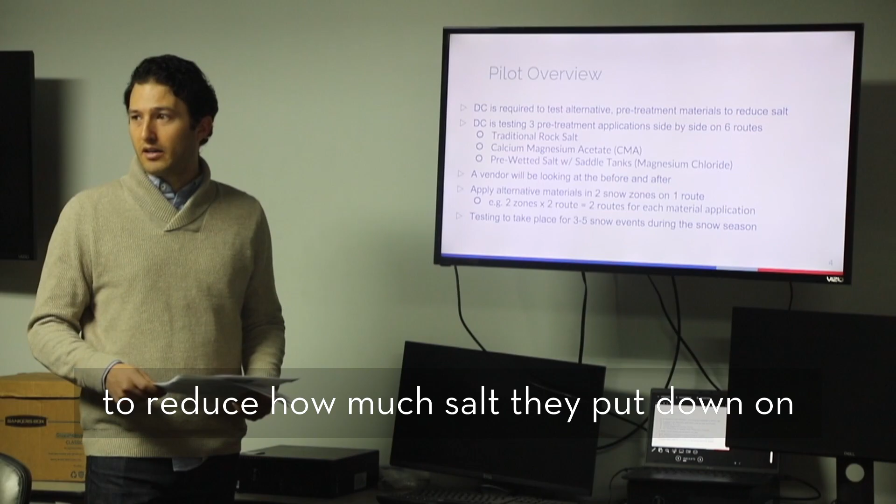So what is the salt reduction pilot? Well, DC is required by the US EPA to try to reduce as much salt that we're putting out on the streets, which eventually gets washed downstream and gets into the local environment. It gets in our rivers, it corrodes vehicles and equipment and roadways. It's essentially quite harmful to the environment. And so the whole region in DC, Maryland, Virginia is actively trying to reduce how much salt they put down on the road during the winter, during snow and ice events.

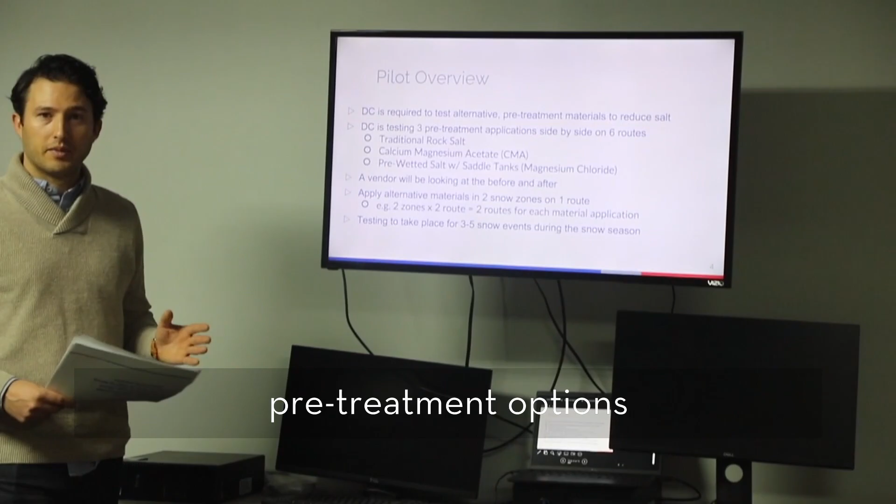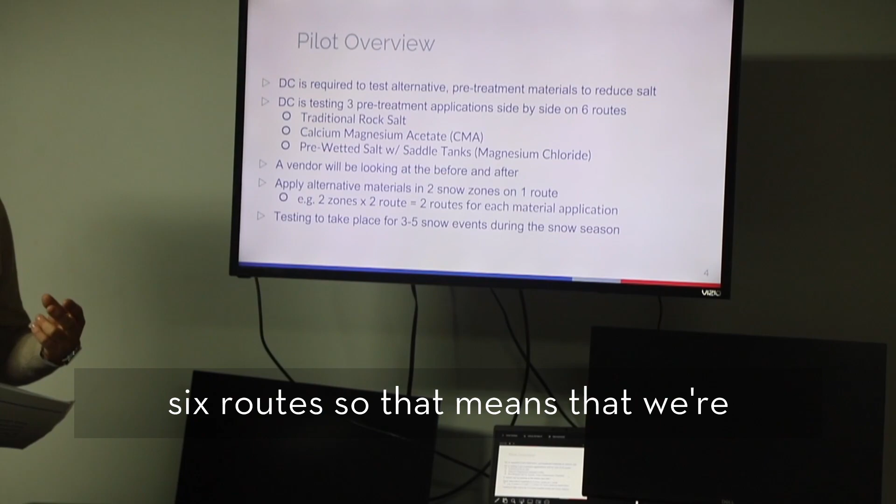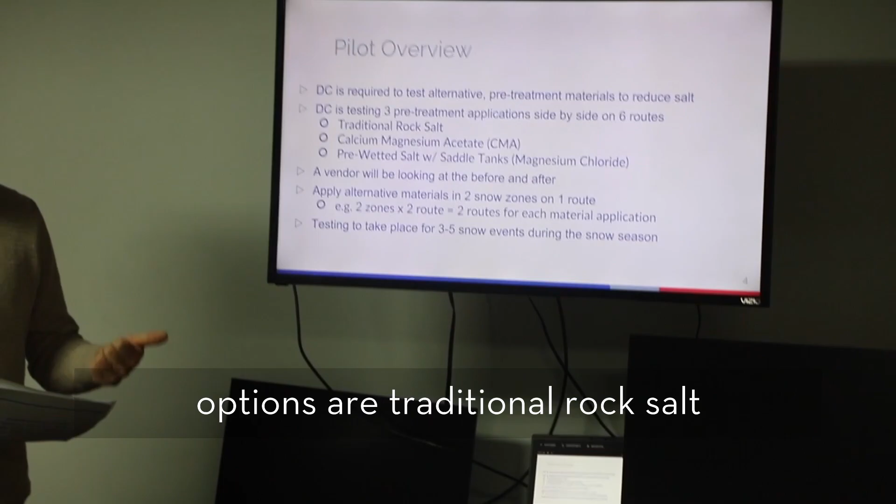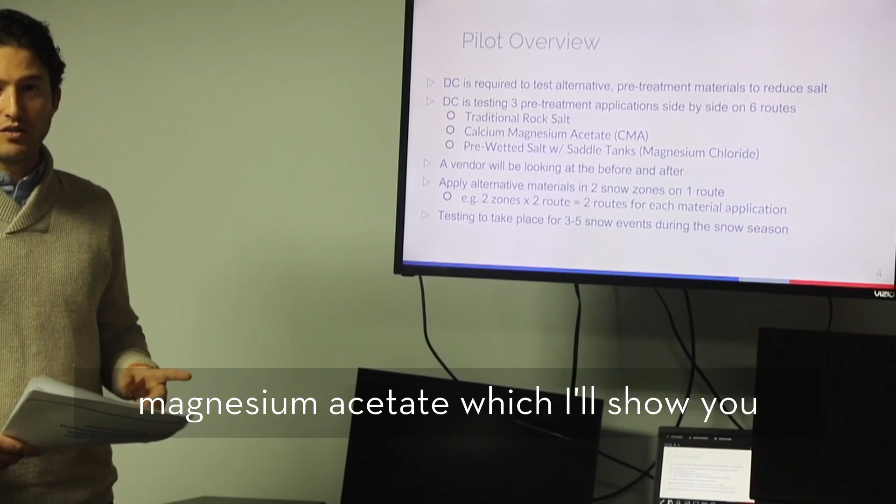So in order to do this, what we decided to do as a city is test 3 different pre-treatment options, side by side on 6 routes. So we have 3 treatment options, 6 routes, so that means that we're going to be testing each material on 2 routes. And we'll go through exactly which routes those are in a second. But again, the 3 pre-treatment options are traditional rock salt. We typically would put down basically the normal material. Calcium magnesium acetate, which I'll show you what that looks like in a second. It's has the same sort of performance qualities of rock salt.

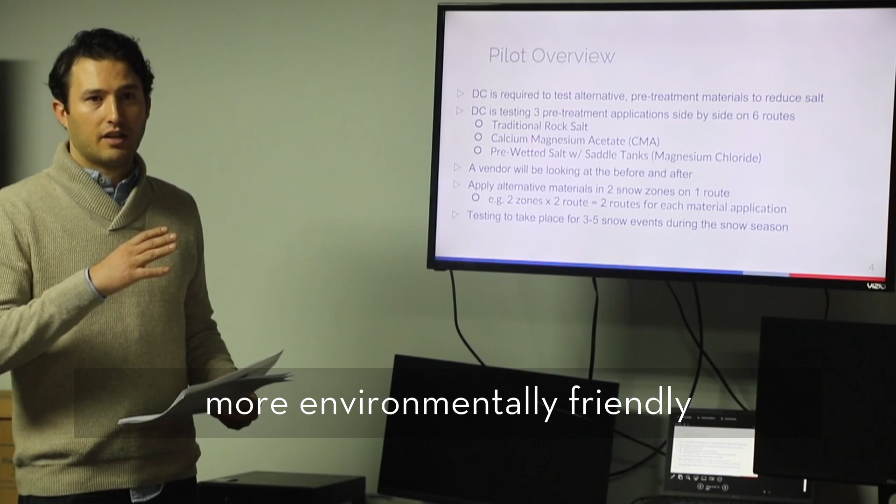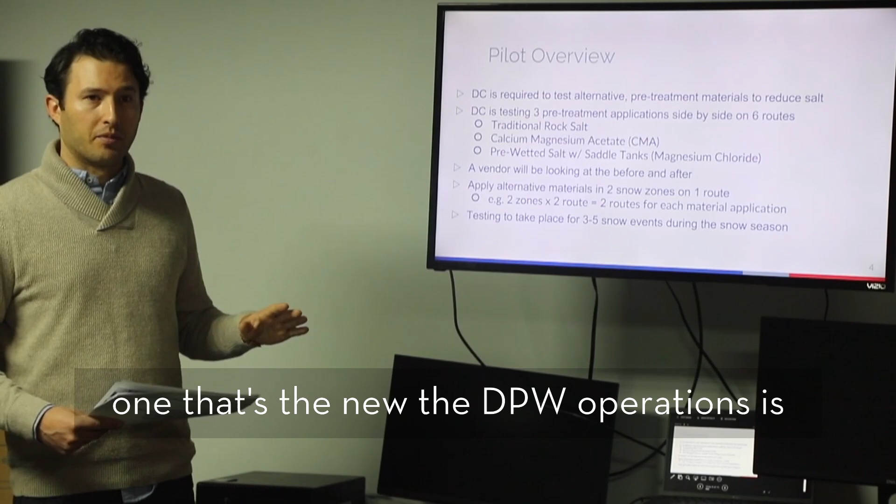It looks a little bit different, performs a little bit differently. We'll get into that, but it's more environmentally friendly. It's traditionally a more expensive material, but they use it on airports because it has a high performance value in low temperatures, and it's more environmentally friendly. So we'll talk about that. And then the last is pre-wetted salt with saddle tanks. So those are the three treatment options that we're going to be testing on 6 routes. The only one that's new to DPW operations is the calcium magnesium acetate.

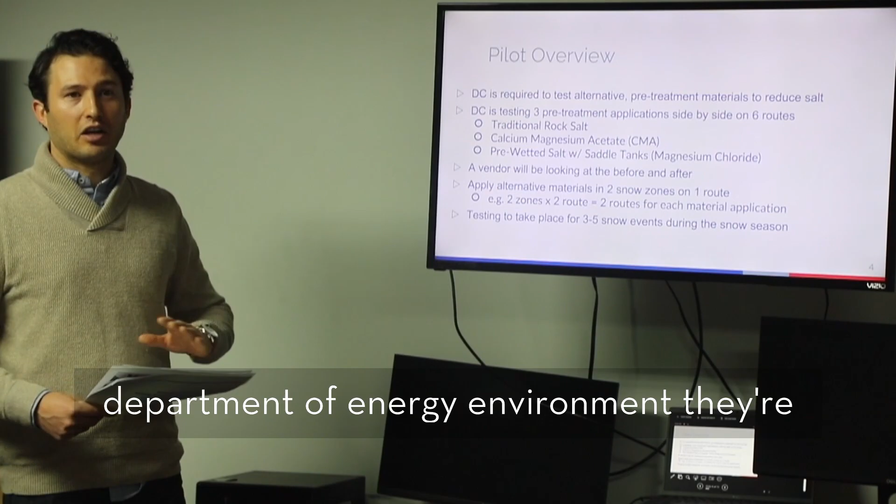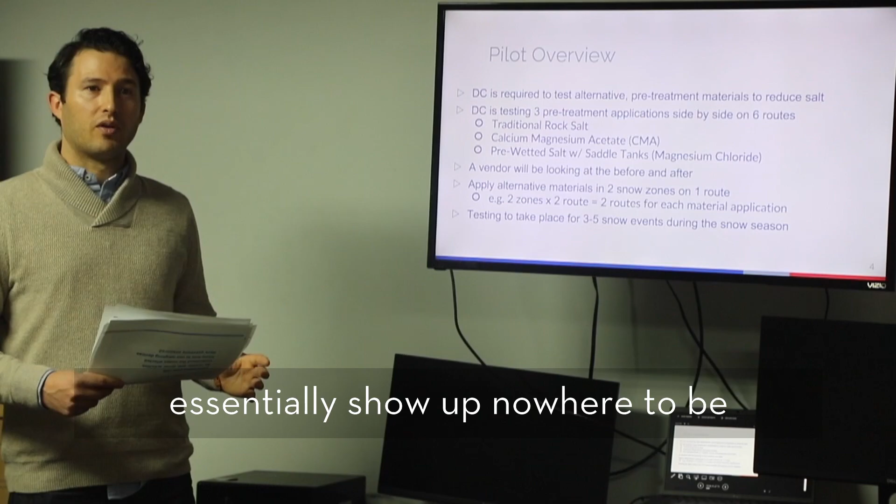A vendor has been hired, Tetra Tech, through the Department of Energy and Environment. They're going to go out and take a look at before and after to assess how well these materials are performing. So all we're asking you all to do is essentially show up, know where to be, understand the material that you're loading in your vehicle, how to check in, check out, apply the material, and that's it.

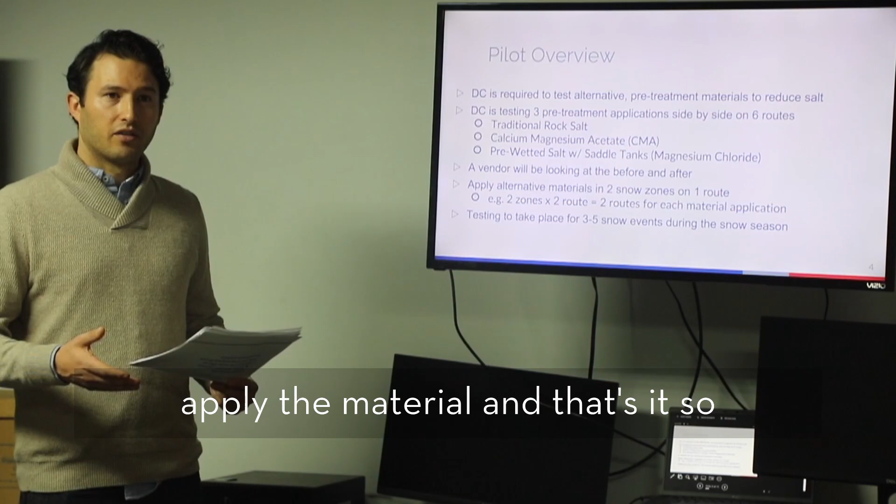So hopefully we're not asking too much different. Again, the only real difference is this new material that we're going to be talking about in a second.

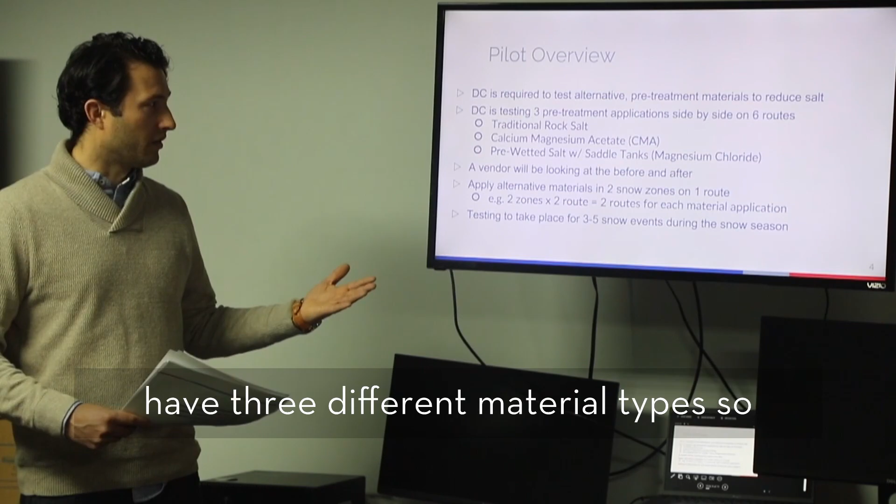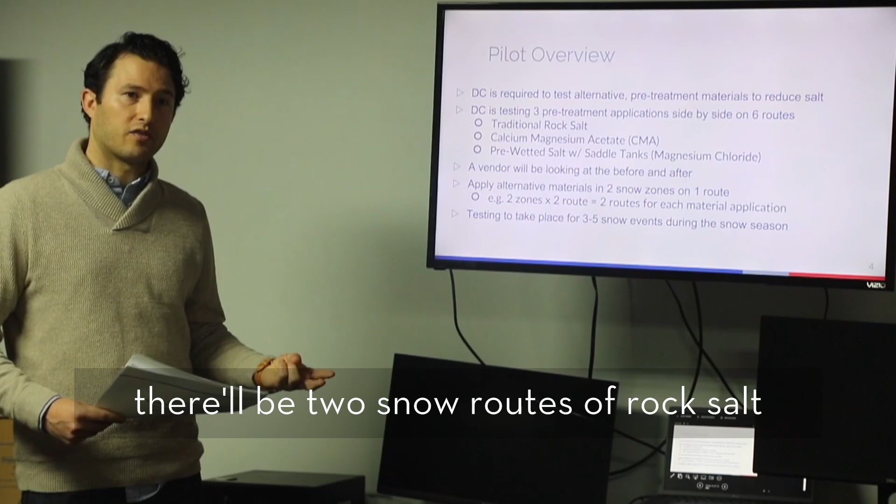As I mentioned, we have 6 routes. We have 3 different material types, so that means there are 2 zones and 2 routes where we're going to be putting down each material. There'll be 2 snow routes with rock salt, 2 for CMA, and 2 for the pre-wetted salt with the saddle tanks. The goal here is to test these materials for 3 to 5 snow events this snow season.

Now, the weather's not been all that conducive over the last couple of years. If we run this pilot twice this year, that would be a huge success. And we'll talk a little bit about when we'll be running this pilot.

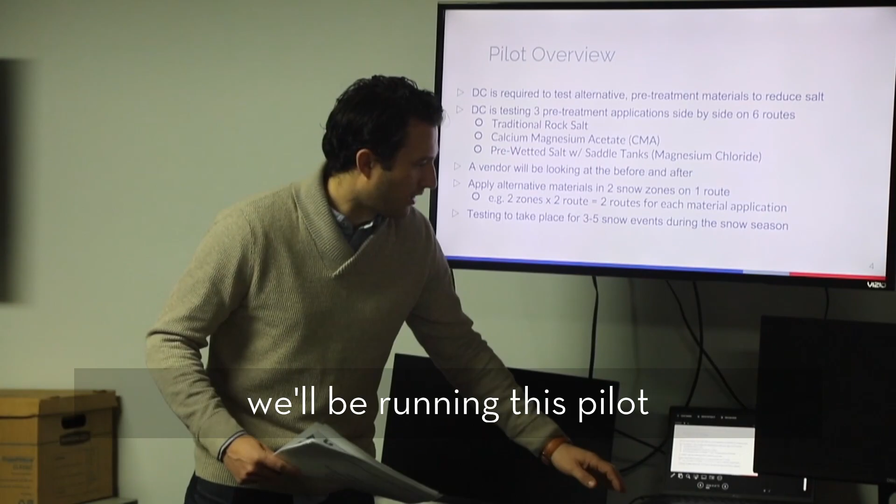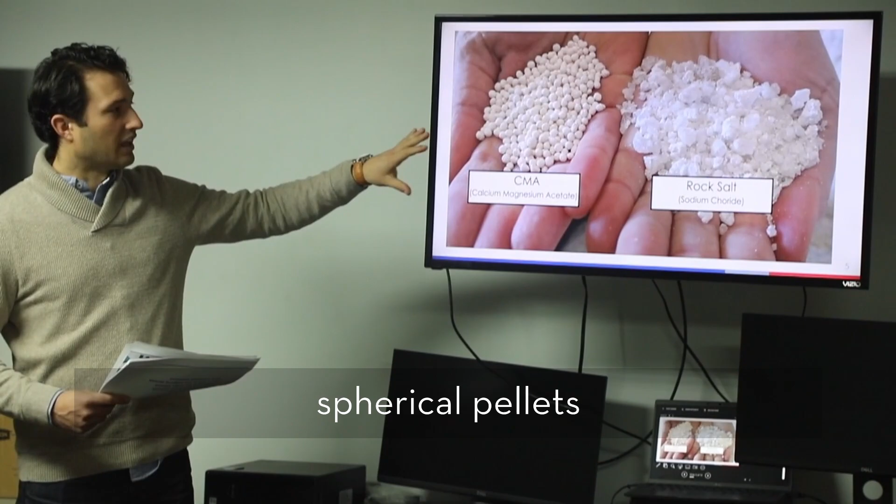So as I mentioned, this is calcium magnesium acetate. Now obviously you can tell the big difference is these are more like spherical pellets, and when you apply them, they sort of bounce a little bit on the pavement. But they perform just as well as rock salt, which is more of a crystalline, kind of flaky material, right?

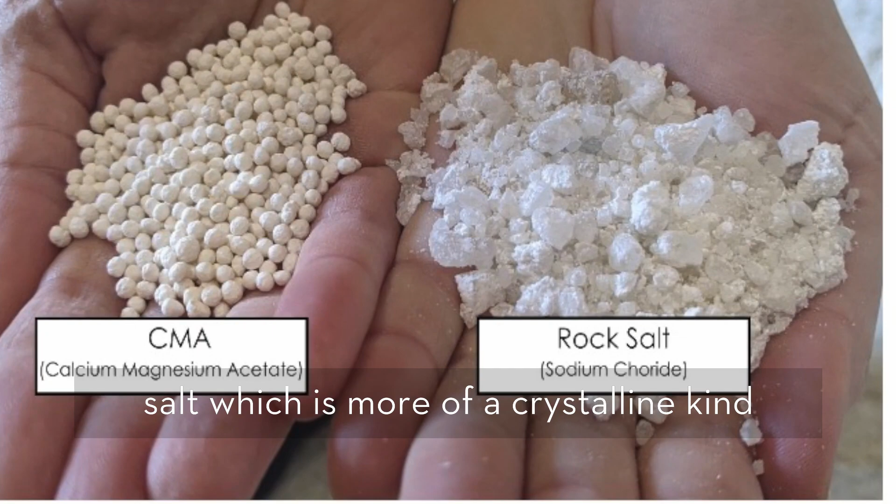Again, this is really the main point of this pilot, to see how well this CMA does compared to rock salt.

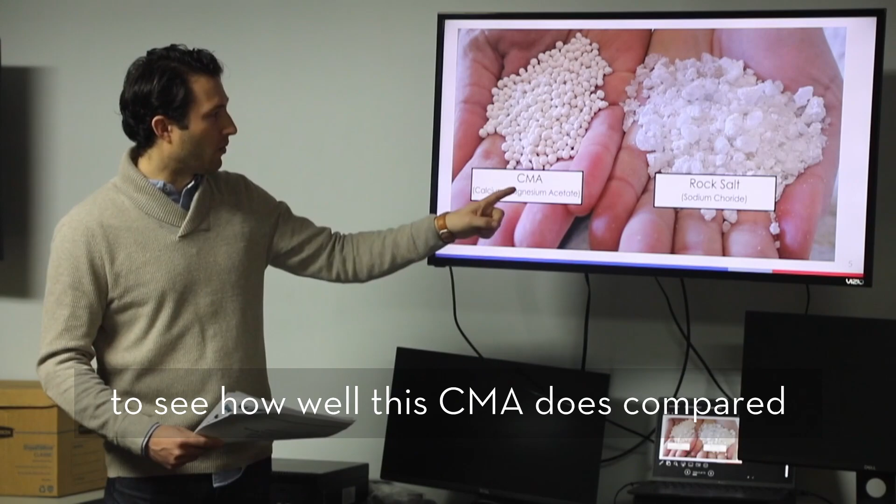Has that been tested? Yes, CMA has been tested, so y'all actually know how good it already does. We did run this pilot last year for one event. Some of y'all might remember that. If you were involved, thank you again for that.

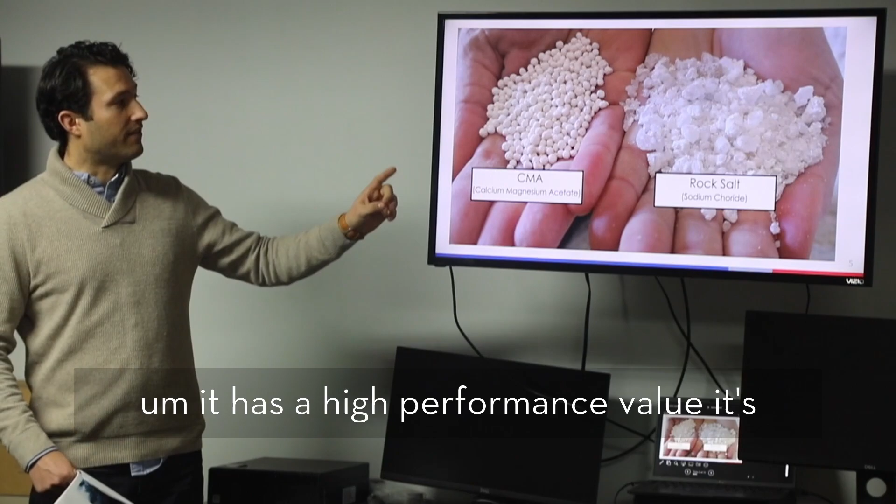But this is a material that is used by different cities, different airports, as I mentioned. It has a high performance value. It's very expensive compared to rock salt. And so that's what we're trying to determine, whether the environmental benefits are worth it.

That's why I was about to ask you, because if that's safer for the environment, why don't we just go ahead and cancel that out and just use that? But you said it's more expensive. Yes, sir, it's a great question. So we're in the process of, through this pilot, determining whether we're going to go this route or not as a city.

So I want to talk a little bit about the driver process now. I think for the most part, this process is not that different than what you'd be typically expected to do. If the weather forecast comes in and we're gonna get snow, ice, maybe some slush, whatever it is, y'all will typically get a notification telling you that you have to report to a certain location at a certain time, correct?

Do you get an email? Do you get a phone call? 9 times out of 10, supervisors get the emails and the employees, supervisors call them. Gotcha, okay. So typically you would be, as drivers, y'all would be notified by a supervisor, either by phone most times, or email.

In this pilot, that won't change. The only thing that will change is what your supervisor will be telling you. They'll likely be telling you something slightly different, because we're not gonna be running this pilot every single winter event. There'll only be certain times that we run this pilot, because as we mentioned, this material is expensive and we only have so much of it. So that's why we're not doing this every single time we go out to pre-treat.

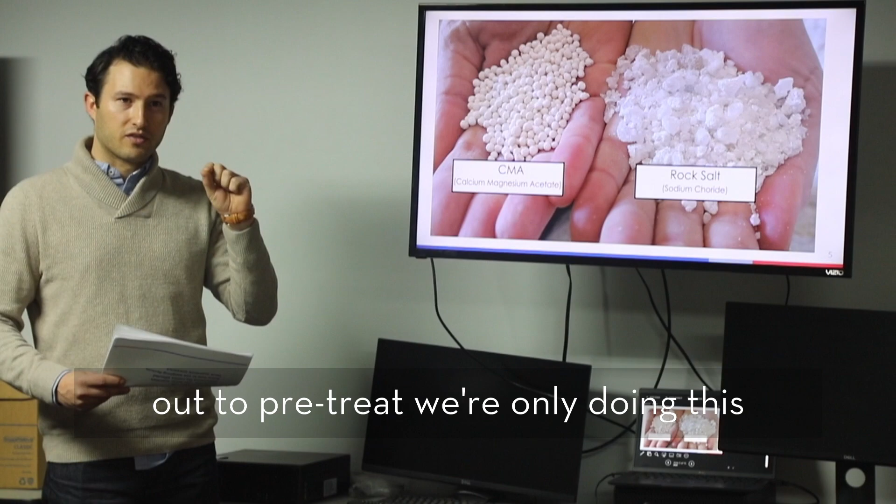We're only doing this in small select areas in the city at certain times. And typically we're looking at weather events that are like, you know, a dusting, a coating, to like a couple inches, because that gives us the ability to see how it performs visually.

So you would receive an activation notification with instructions for the pilot implementation. You'll be receiving an email or phone call with specific directions on where to be, what equipment to use, where to load up from - all of that. That'll be specific to that day and that event. So you don't have to worry about anything other than just being in touch with your supervisor, who will let you know everything you need to know.

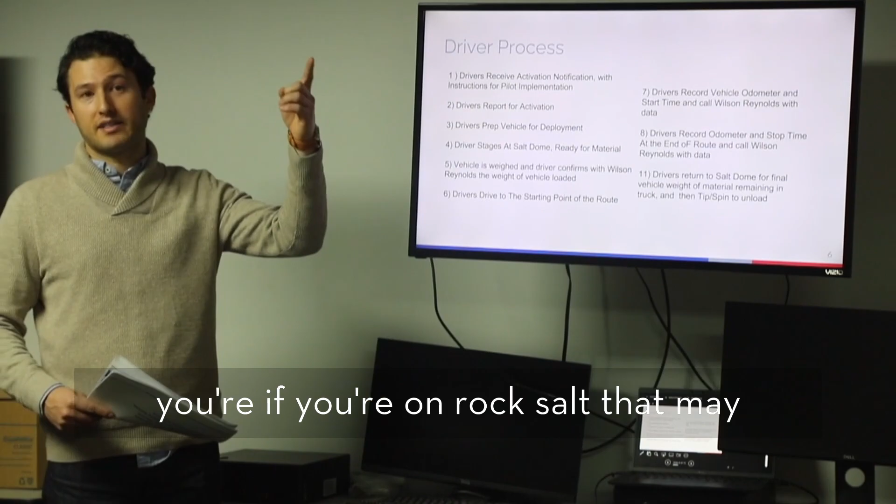And then you all would report for activation, wherever that may be. That may be, if you're on rock salt, that may be at South Capitol. You might be loading up from over there. You may need to get your vehicle from another location and bring it to another location, get it loaded up. That's all to be determined, and that's kind of what your supervisor will tell you.

But ultimately, you will all report here to W Street before we go out and run the pilot, and you'll understand when we go out and do the next portion of training why that is. So this is kind of like ground zero for our operations. But it's important to remember, you're not coming here first - there likely will be another step. You might have to go fill up your truck with brine, or with salt at another location. Even though we have a salt dome here, this may not be where you're directed to load up from, okay?

You'll prep your vehicle for deployment as you typically would. You would stage at the salt dome ready for material, if that's here, if that's South Cap, if that's somewhere else, that's what you would do. And then you would arrive here, and we're talking about the vehicle being weighed. We're going to go outside and do a tutorial in a bit with MPD, who have portable scales to weigh your vehicle before and after. That should be interesting to find out how that works.

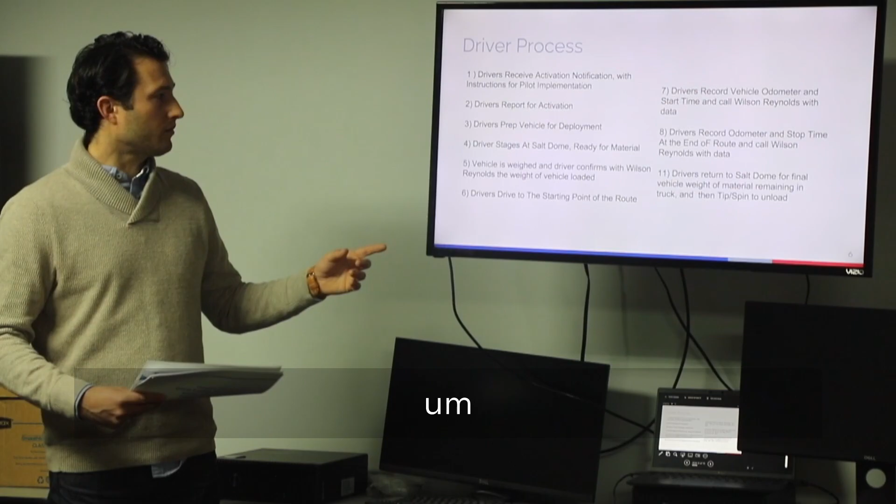So once you guys arrive here with your vehicle loaded up, we're going to weigh the vehicle, and then we're going to send you guys on your way. But it's important that there's a constant flow of communication. So I will be here on the day of, so you all can get to know me, know my face. I will be out here, rain, shine, sleet, snow, whatever, with you guys, walking you through the process and writing down lots of information - vehicle weights, time of day, all of that stuff. So it's important that we just have good communication and that we're in constant contact.

Okay, yes ma'am, question. So these drivers that are here today - these will be the drivers actually doing the pilot program? Yes ma'am. Okay, so when you tell us on this snow event tomorrow, you all will be doing the pilot program, they will be here at W Street, back there at the Salt Dome? Not specifically. Eventually, yes, everybody will come here before you touch your routes. But there may be, depending on which salt dome is open or depending on what piece of equipment you're told to use, that may require you to go report to another location to get your vehicle, load up your material, and then report here.

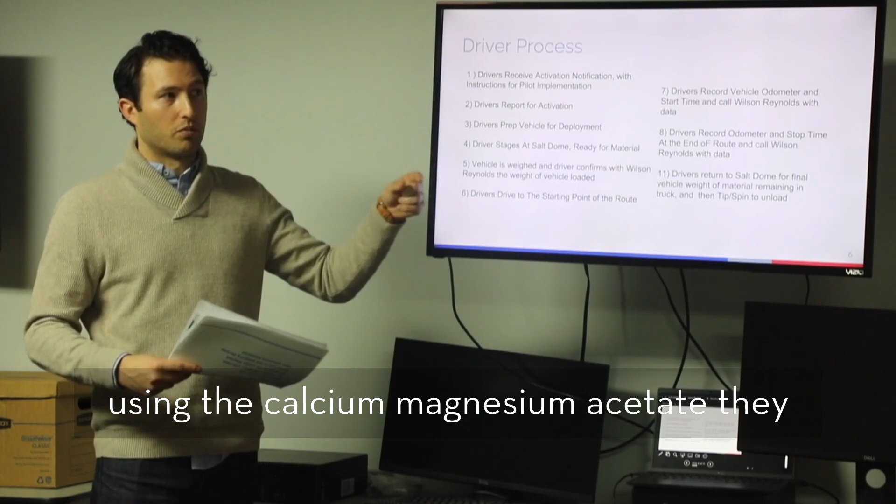But the drivers that are going to be using the calcium magnesium acetate, they will report here and load up from here. Yes ma'am, we'll go through that in a second - it's a good question. So again, the vehicle is weighed. We'll write down your vehicle weight before you go out, so we understand how much is in your vehicle.

And then you'll drive to the starting point of the route. Once you're at the starting point of the route, you'll record your vehicle odometer and start time, and then you'll call me - again, I'm not Wilson Reynolds, but you'll call me and my contact here with that information. So, 'Hi Blake, I'm at the starting location, my odometer reads 12,000 miles, whatever, and it's 9 a.m.' Okay, and then I always say, go ahead, treat the route.

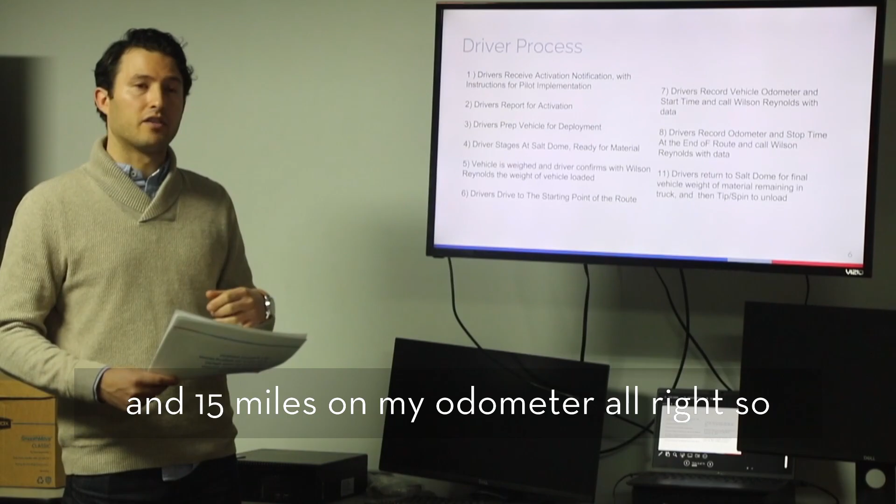And then that's it - that's really all we're asking in terms of communication once you get on the route. And then again, at the end of the route, stop what you're doing, pick up the phone, call me, say 'Hey, I finished my route, there's 12,015 miles on my odometer.' All right, so you traveled 15 miles, and my end time is 9:45 a.m. Okay, that's very important information.

So a lot of this is just about collecting information and data so we know what's been put down and how well it's performing. And then lastly, you would return back here to W Street, and we will weigh again - we'll weigh your vehicle a second time. And so by weighing it once and weighing it twice, we get a sense of how much material was put down. Does that make sense? Yeah. Okay, cool.

And then eventually, from here, again, you may need to go to another location. They may say South Cap is the dome that's open, or where you're gonna load up your brine is over in Northeast. So that's where you would go to.

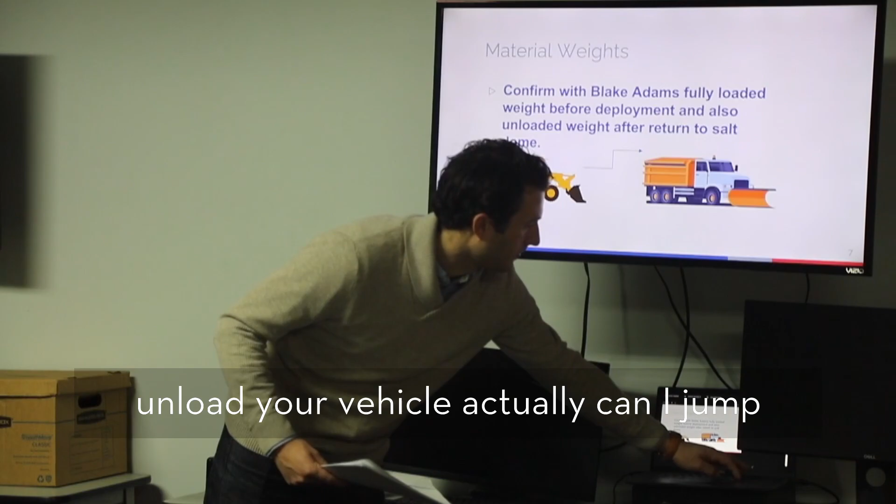Or Farragut, yep. And tip off, spin, basically, unload your vehicle. Actually, can I jump in real quick? Please. I just want to say, this is like the distilled version of this entire training. It's probably the most important part, which is why we gave it to you twice. So this secondary sheet is also just this information, but it's referenced more plainly for you, just to reference when you need.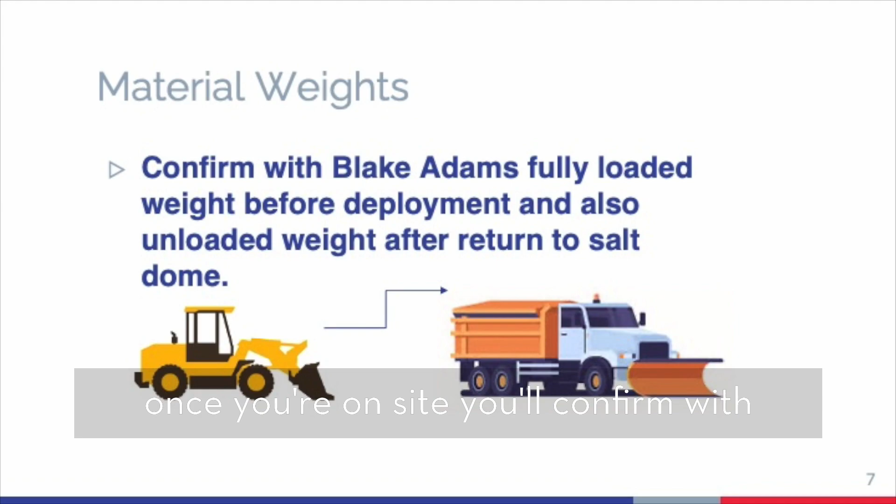Alright, so we're gonna kind of go through this again a little bit. So again, my name is Blake Adams. The goal, you're gonna be notified by your route supervisor of where to be, what equipment to get, and what type of material you'll be working with, time of arrival, and whatnot. And so, once you're on site, you'll confirm with me that your vehicle is fully loaded, and then we'll weigh it together. And then we'll send you off for deployment. And then also, when you return, we'll weigh your truck, get that weight, and then allow you to go and tip off, spin off, at another salt dome.

Again, it's important that, to me, at the starting point of the route, your odometer reading, how many miles are on your vehicle, and the start time at the beginning of the run. And then again, you would do this when you finish the route. We're going to talk about what your routes are in those areas in a second. But the important thing is that you can't just go out to your route and treat it and come back in. We need that information of start time and odometer reading.

And my phone number is included in there, so you'll be able to get a hold of directly to me. And if anything happens on the route, you can contact me and say, hey, this is what's going on. So I'm here to help. I'm here to assist you all as much as you all are here to help the agency, okay?

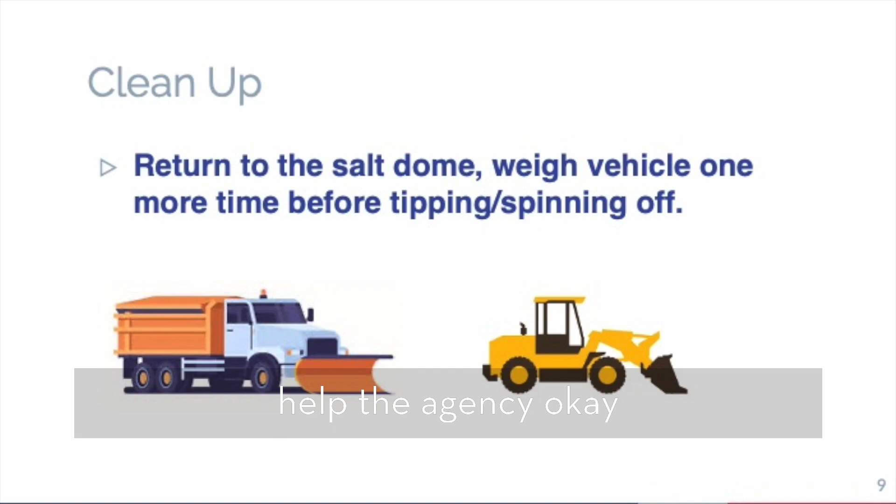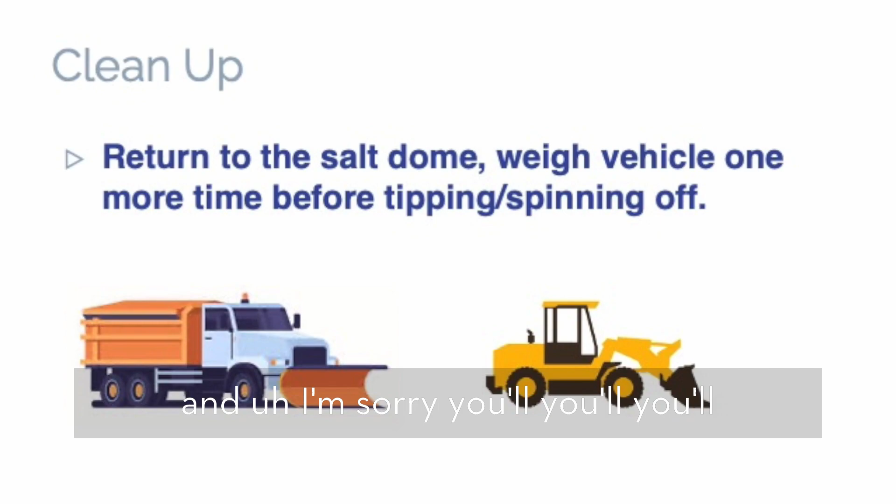And again, afterwards, you'll return back to the Salt Dome or Farragut—I'm sorry, you'll come back here, weigh the vehicle one more time before tipping and spinning off. And again, that may not be here at the salt. There is a Salt Dome here. That may be somewhere else.

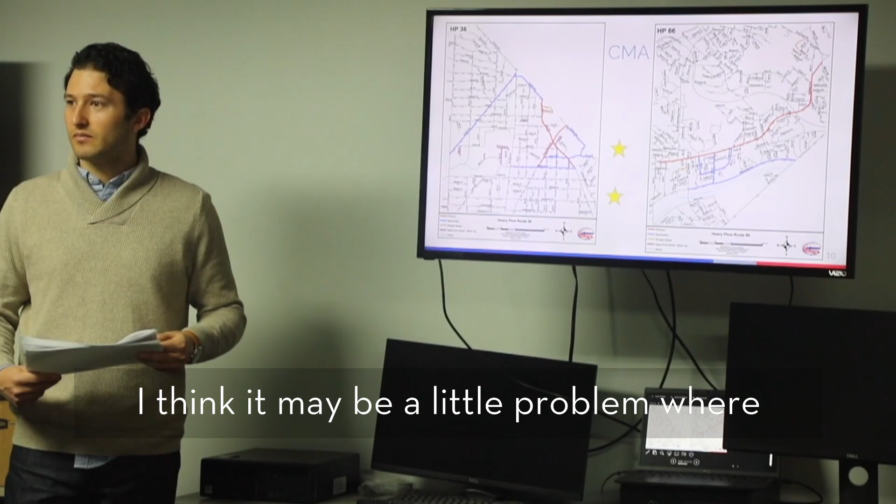Okay, any questions before we get into which routes we're touching and roles and responsibilities? Yes, sir. I think it may be a little problem wherever y'all decide to, what Salt Dome y'all go to, because where the route's at, like, especially where mine's at, if you have it at South Capitol and it's uptown, it may be a problem. So if it is at South Capitol, is there any way that it right near South Capitol can be designated for the salt area?

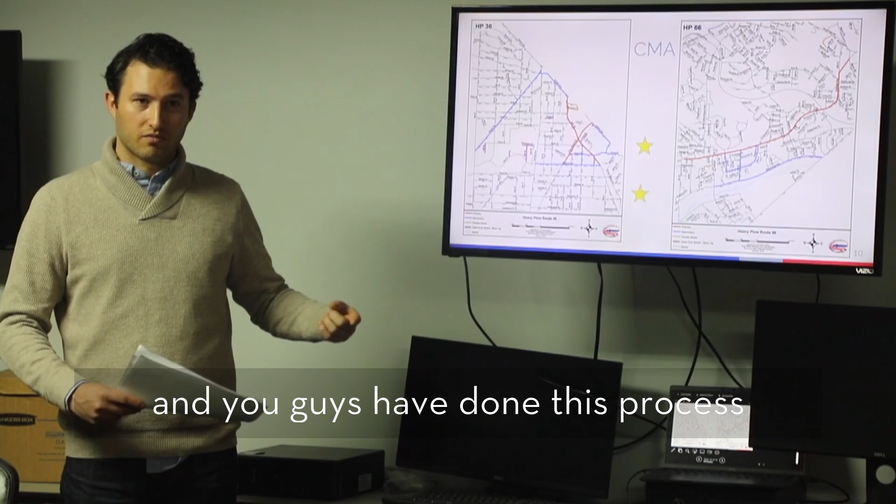Well, here's the good news. Yes, that might be the case where it might be a little bit of a distance traveled. You might have to go to South Cap and then here and then back to your route and then here and then back to South Capitol. I understand that's a lot, right? Here's the good news. We're only touching the reds. And once the reds are done and you guys have done this process, you're done with your shift. So that's the pro here. Is we're asking you to do a lot of movement, touch a lot of equipment, a lot of communication, but it'll be a short shift.

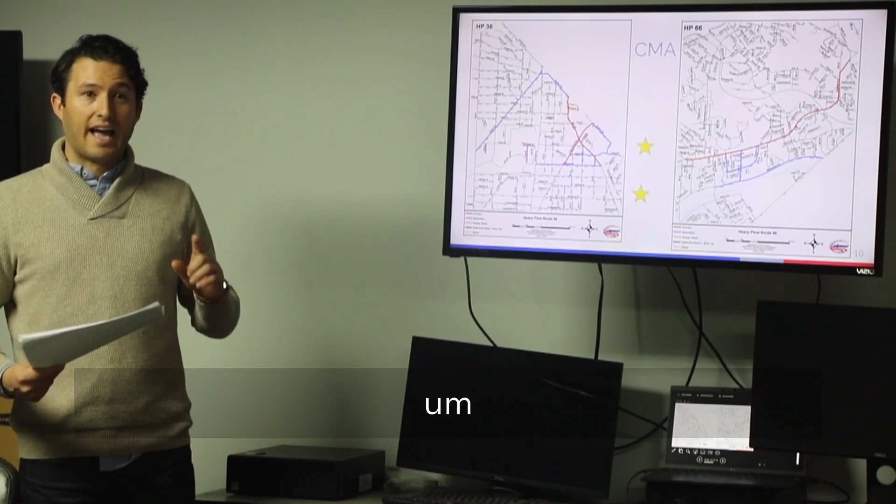And I'm being candid about that because this is important. Last year when we ran the pilot, we did it once. I'm pretty sure once every driver showed up, they were home or they were gone in about 2.5 hours.

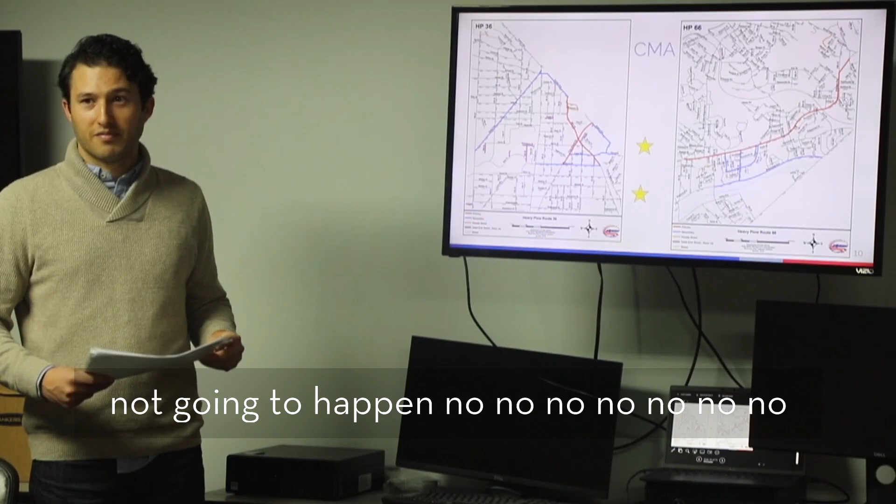It's really quick because again, we're only touching the reds, the primaries. We're not touching the blues, we're not touching the secondaries. That's good. We're only touching the reds.

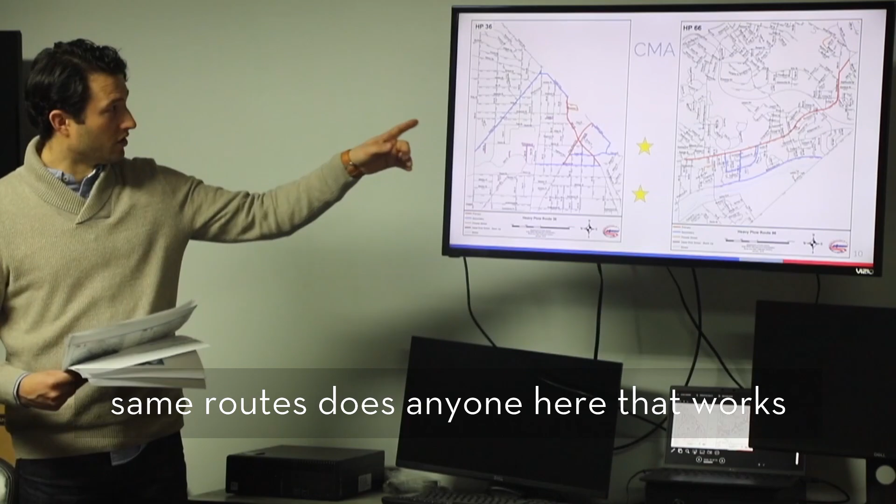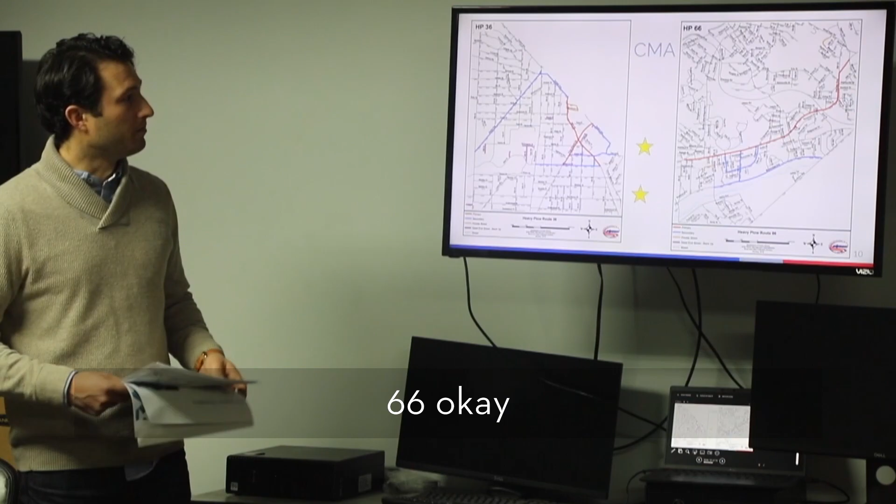Okay, that's good. So now that we've got these routes pulled up, I know sometimes y'all work on the same routes. Does anyone here work on either, is familiar with HP 36 or HP 66? And there are maps in your packet if you want to take a closer look to familiarize yourself with it. I'm a supervisor from 66. 66, okay. So both of these routes are routes that are going to receive the calcium magnesium acetate. Okay, so it's good that you're here today.

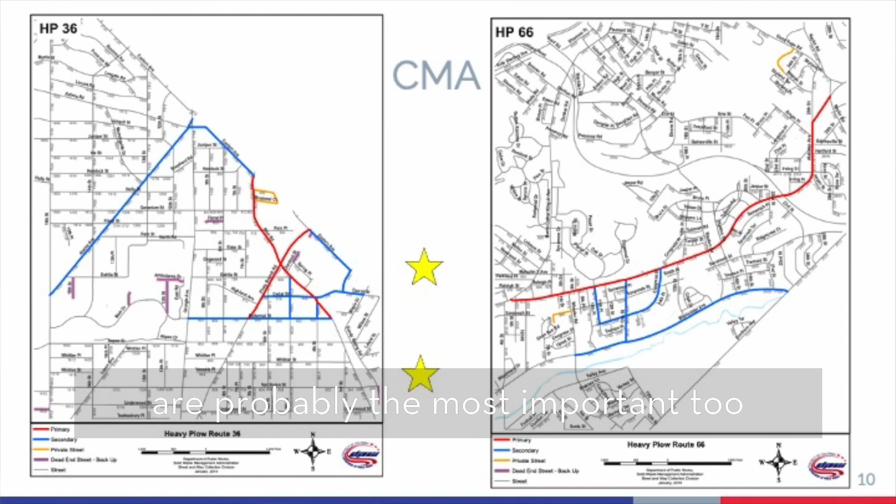These are probably the most important too. They're all important, but these are important because, again, the material we're going to be putting down is quite expensive, and we're very interested in how it performs. That's your route, Clyde. Okay, your route, 36.

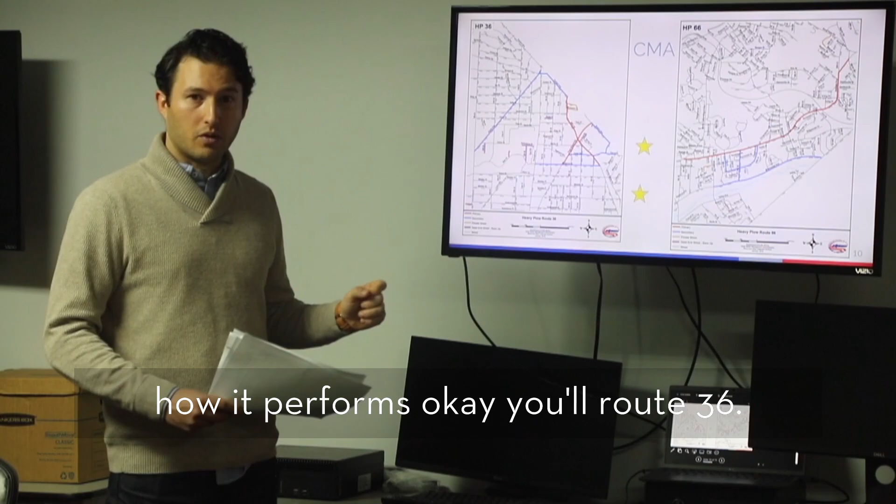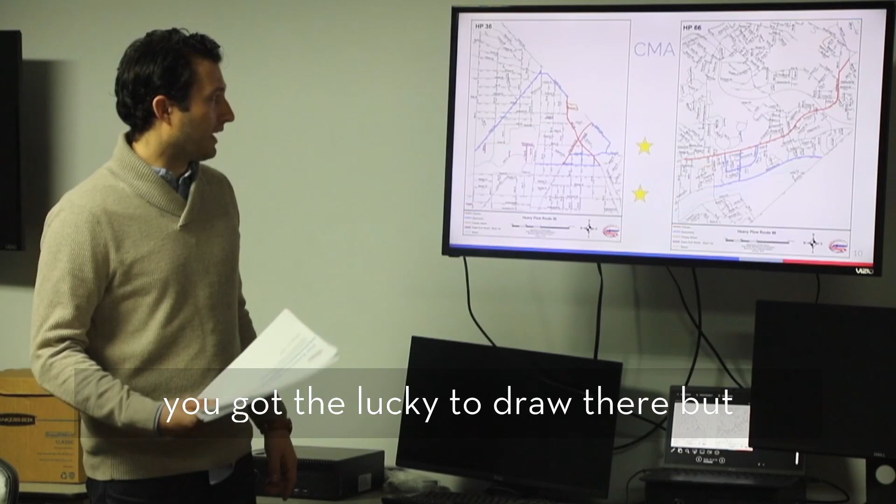So you've got this sort of crisscross pattern here on Piney Branch and Blair Road. I think this is the smallest one, so you got the luck of the draw there. But again, we're working with new material and it can be somewhat unpredictable on how it performs.

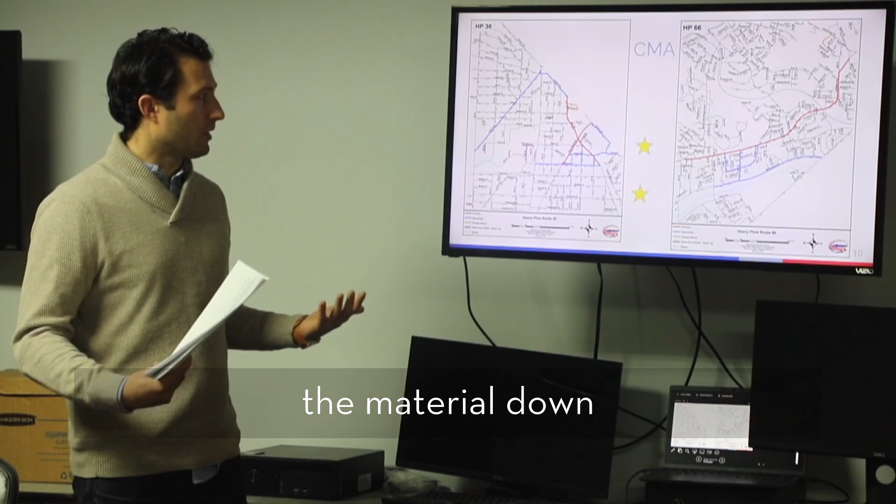Again, constant communication is key. If anything happens on the route, you can get a hold of me, you can get a hold of your supervisor, say, hey, I put the material down, something's going on with my spreader, and we need to know that type of information. Or my truck is not performing the way we want it to, and that's all useful information for us. So again, I want you guys to feel like you can get a hold of me, you can get a hold of your supervisor, during the actual treatment.

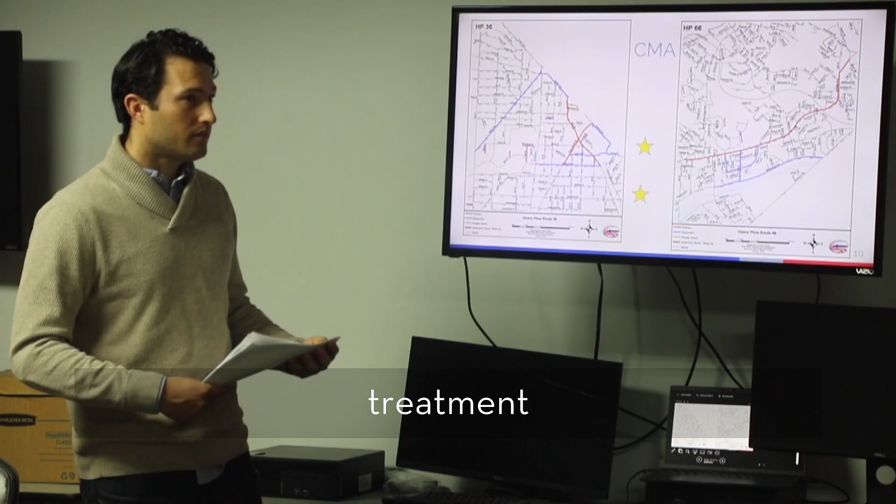So basically, everything that you're telling us is what we do already. We just got to report it to you. Yes, sir. Yes, sir. Yep.

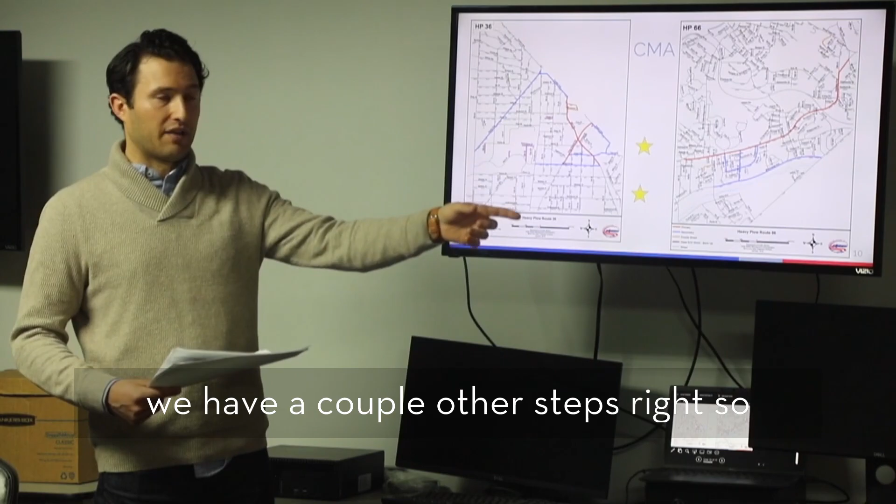And then again, as I mentioned, location, arrival time, that might be very different than what you typically receive on a normal activation. And in addition, we have a couple other steps, right? So you have to weigh your vehicle before and after.

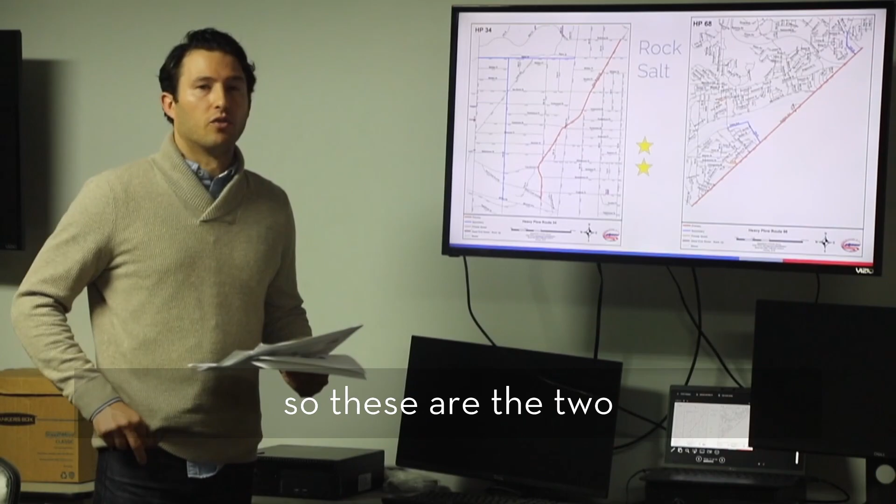I got a question, who's down there? So these are the two, I'm sorry y'all, we're almost finished, I appreciate y'all. So these are the two rock salt routes, HP 34, HP 68.

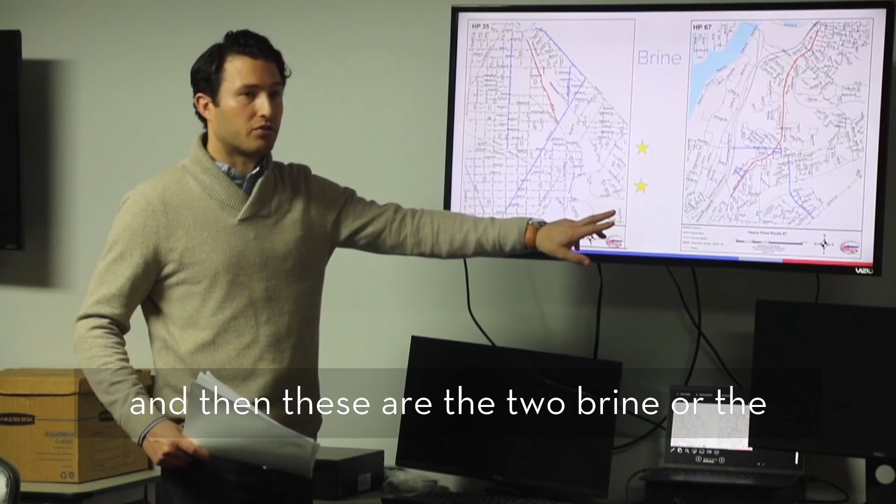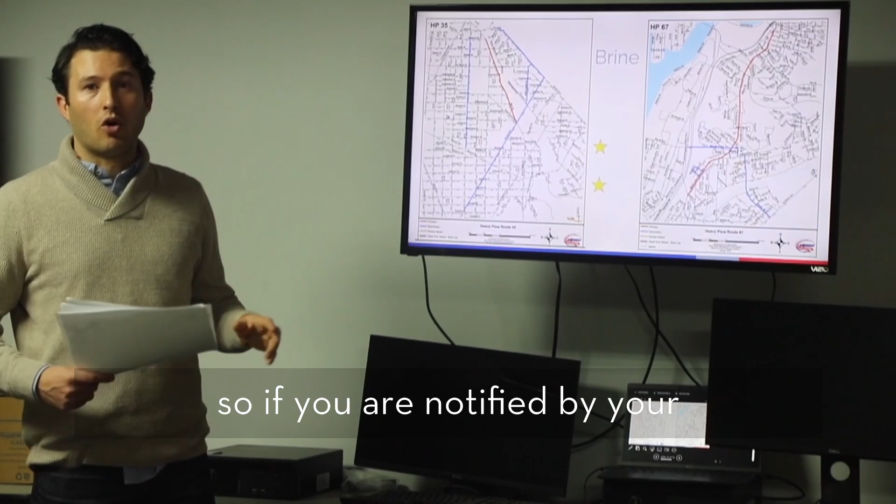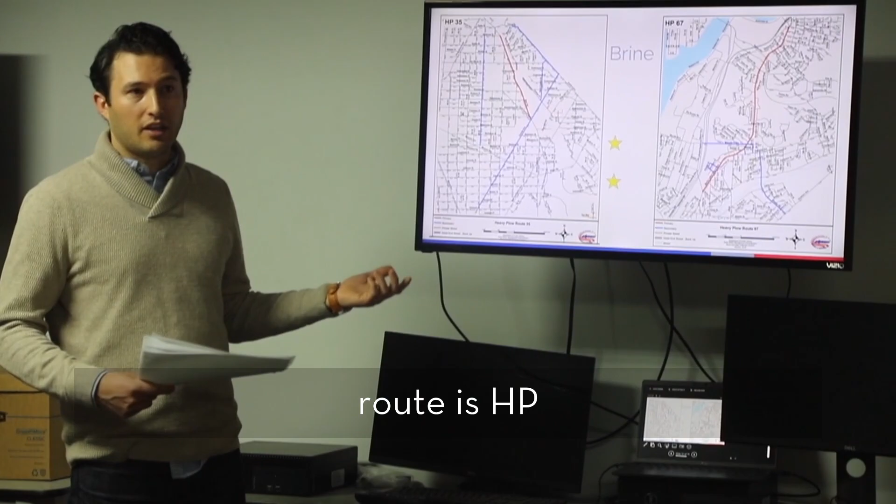And then these are the two brine or the wetted salt, HP 35, HP 67. So if you are notified by your supervisor that you need to report at W Street by 10 a.m. on Saturday, and your route is HP 35, now you know exactly what you're going to be dealing with, what type of material, all right?

So again, these are the two calcium magnesium acetate routes. You'll be using a CMA, typically CMA, you'll be using these rock salt trucks.

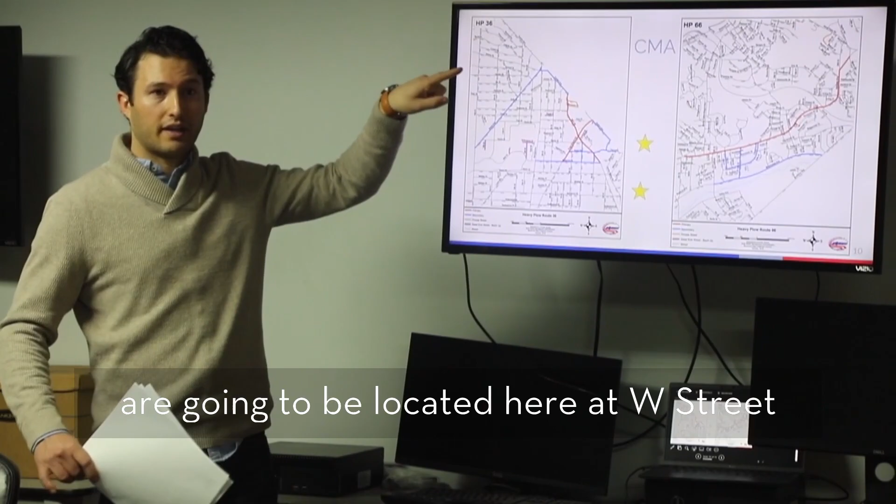The good news for y'all is that the trucks are gonna be located here at W Street, and they're gonna be fully loaded for you when you arrive. So the CMA drivers, you will most likely report directly here before going out, okay?

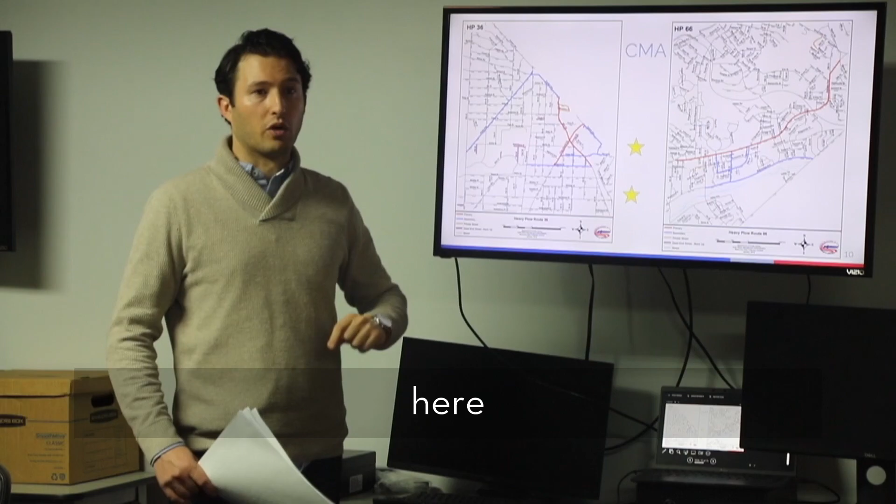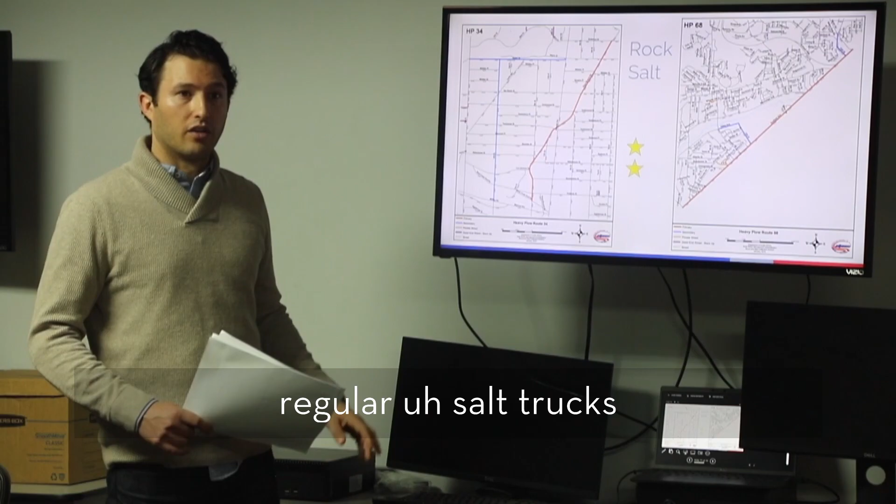Again, these are the two rock salt routes. Now the folks will be using regular salt trucks. Your starting location eventually will be here, but it may be somewhere else. Again, you might be asked to load up at a different dome before coming here, okay? So the main thing is everybody's supposed to come here.

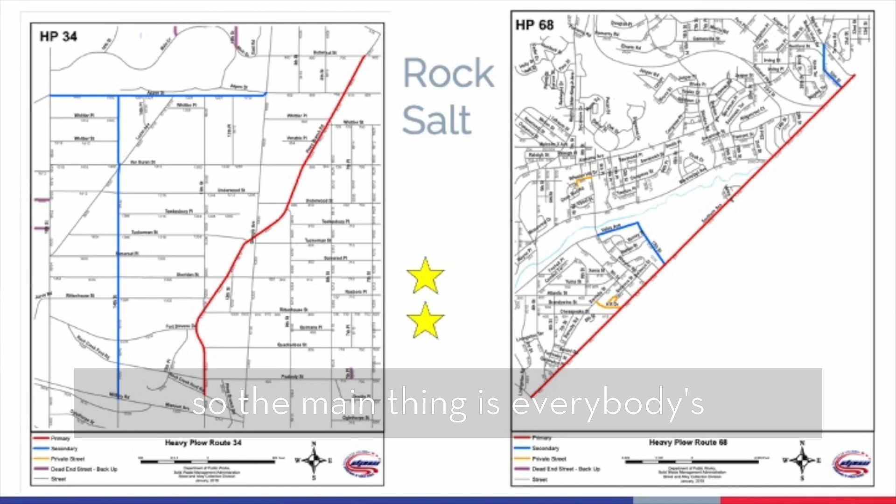So when the regular salt, are they still coming here with it? Yes, yep, as well as brine. You're gonna be on brine, that's yours, that's your route. So these two routes are gonna be on brine.

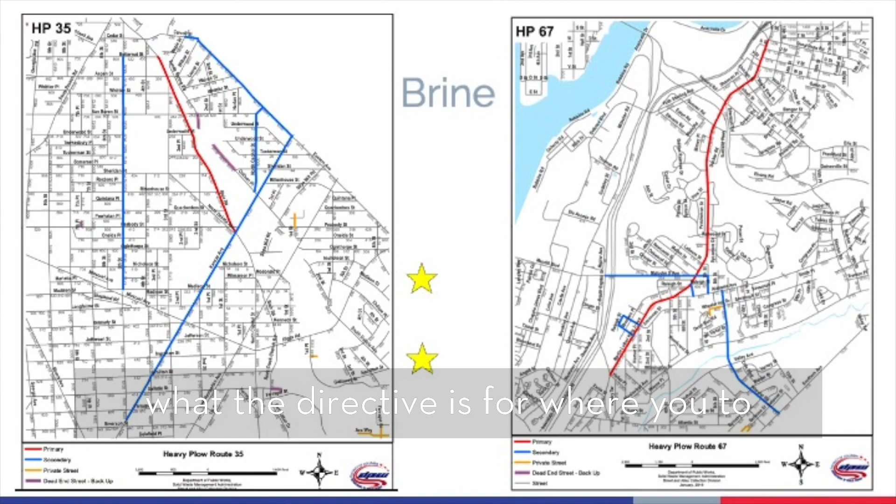And so again, depending on what the directive is for where you get pumped up, your vehicle, the tank, to get fueled up, the brine, that might change, but again, eventually you will report here. Is that in here?

My name is, again, Blake Adams. I'm the main point of contact for this pilot. I will be out here with you all when we run this thing. I'll be walking you all through the steps, so you can lean on me as much as you need once you get here, okay? You can also call me when you're on the route. You can call me even if it's 30 minutes before we're about to start, or an hour, or a couple hours, you can call me.

Pick up the phone, give me a call, say, hey, I'm a little bit confused, I talked with my supervisor, I'm still not quite sure about what I'm supposed to be doing. You can call me. And then in addition, you have the shift.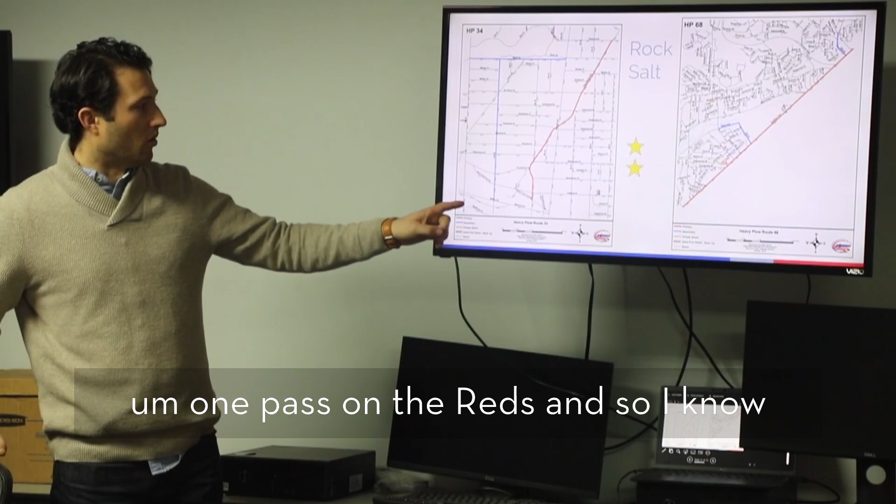So you'll be doing one pass on the reds. I know some of these roads are 2-lane and some might be 4, so you would basically do one pass per lane and that's it, right? Is that typically what y'all would do? Yeah, we go down the street and then come back. Yes, so both sides, all lanes, once.

And the amount of material we're going to be putting in your trucks is going to be specific for one time. So we're not pushing the snow, no shoveling, there will be no blades, no plowing, none of that. And actually, we won't be operating during that time - this is a pre-treatment event, so it's going to be before the stuff comes down. That's the main thing.

So y'all need some standbys - the whole 36 route. When we go home, y'all take care of the whole route, 36 - that's Blair, Piney Branch, all that. Piney Branch and then Blair Road.

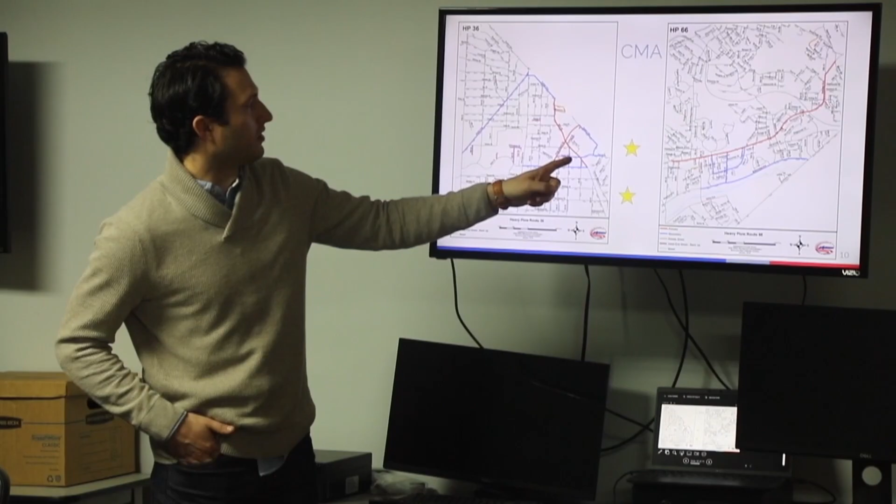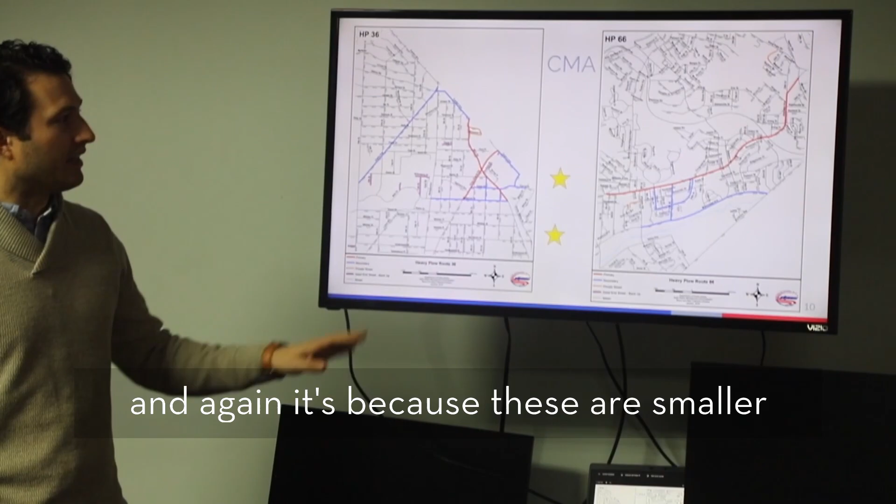But no, just the reds again - we're not doing this little section or the blues, right? Yeah, and again, it's because these are smaller - although this one is a little bit bigger - but we only have so much material.

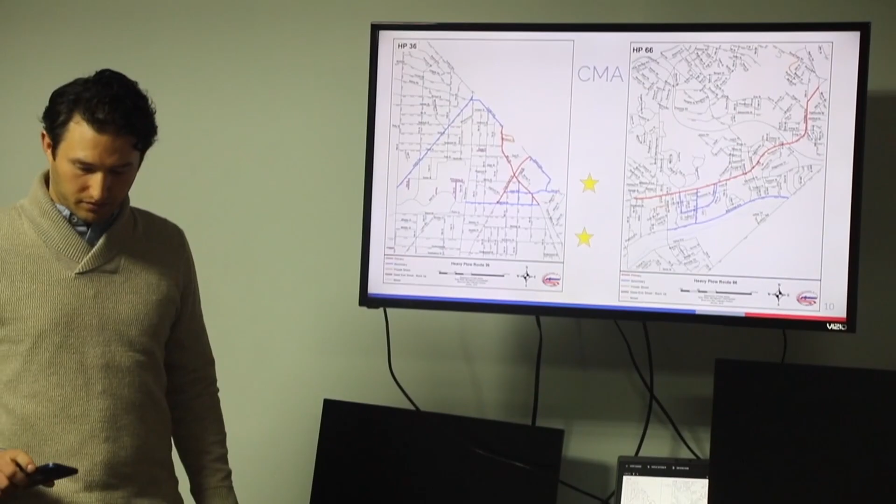Will it be 2 days prior, 1 day prior, or during that day? Great question. So we will typically deploy within a 12 to 24-hour period before the stuff comes down, and in some cases it might be closer to like 6 hours. Again, so we're going to be putting pre-treatment down.

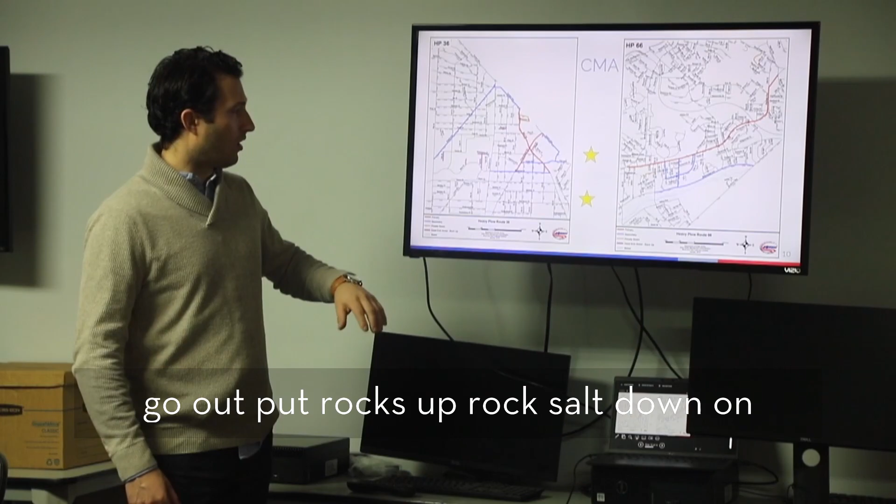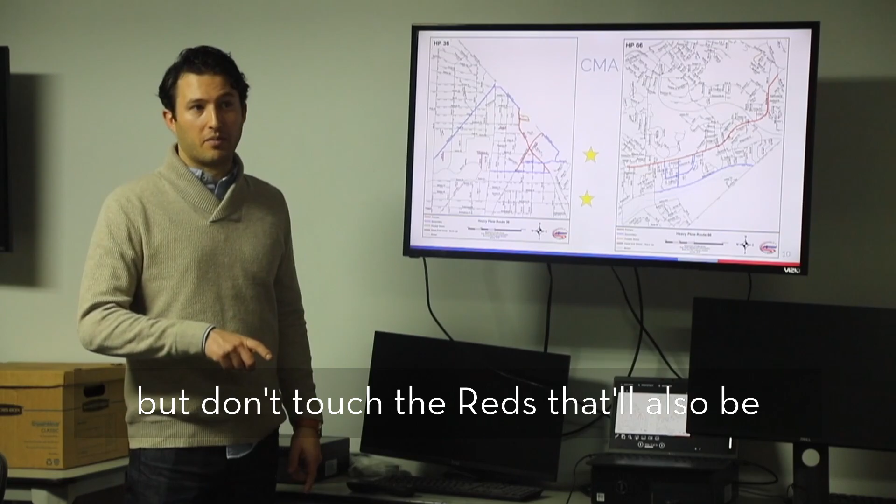There may be an instance where you're asked to treat prior to activation on this pilot. You may be asked to treat the entire route except for the reds. So if this is your route, you might get a phone call on a Thursday that says, go out, put rock salt down on the residentials and the secondaries, but don't touch the reds. That'll also be a part of that.

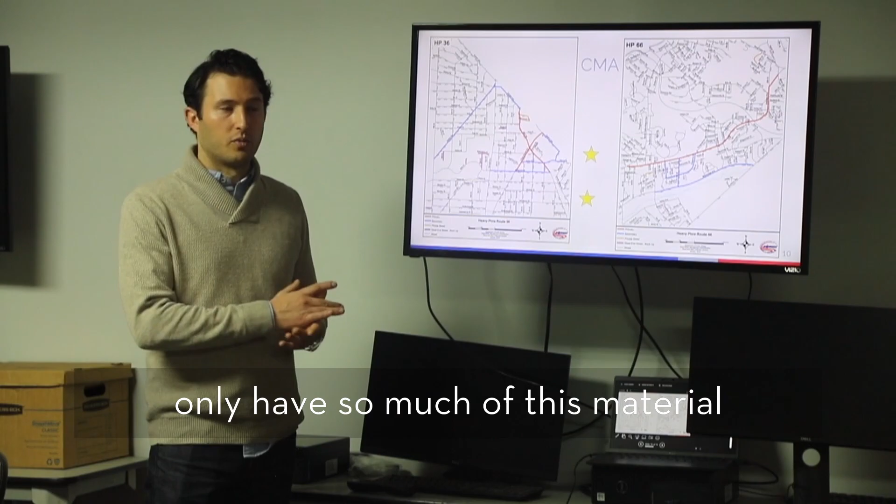And that's a scenario that might happen. And then we might do it again separately later on and say, all right, now we're gonna go out and just touch the reds with the CMA. And again, it's because we only have so much of this material, so we can't do the whole route. But that guidance will be very specific.

Now I'm confused. Hold on, wait a second. So this goes back to when we call you, y'all go out and do the routes, right? Right, correct. When y'all finish, y'all do the weigh-in, the end time, the odometer, all that stuff. And they gonna tell you where to run the rest of your salt off, whatever you got. Then that's when you come back to load up with regular salt, and then you continue on to do the rest of your route, but you're not gonna touch it. That's why I'm confused.

Thank you all, that concludes this portion of the training. I really appreciate you all and your willingness to help us out. Again, my job is to make this as easy and smooth and straightforward on the day of the event as I can.

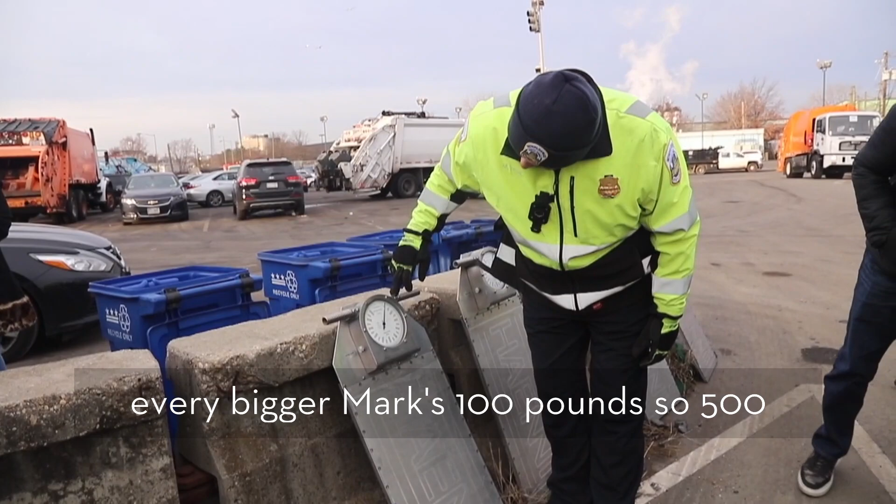So that you're not getting a bad weight, because if it's up there, I mean, you got 500 pounds. So you zero the needle, and then every bigger mark's 100 pounds. So 500 would be in the middle, 1,000, but every larger mark is just 100, 1, 2, 3, 4, 5. I mean, it's literally that simple.

When you're weighing, the main thing is, and we speak from experience, sometimes my guys get lazy, so they'll put them down and have a truck roll over them. Then another truck might come up and try to roll over it again, but you can't do that because you always end up running over the dial. So you kind of have to reset them every time. All right, but I mean they're fairly simple to use. We'll put them under the wheel.

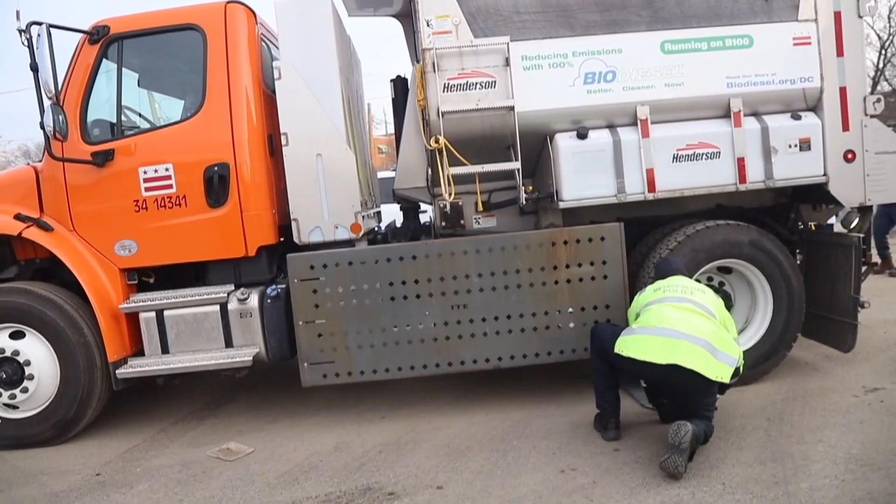The only thing you want to watch, when he's going to get ready to drive, don't stand here, because if that tire grabs a hold of it, it'll shoot it out if he's not gentle. So just stand on the drive wheel side, whichever way he's going to drive. That way, if that grabs it and shoots it out the back, you don't have 40 pounds of metal hitting your legs or shin or anything like that.

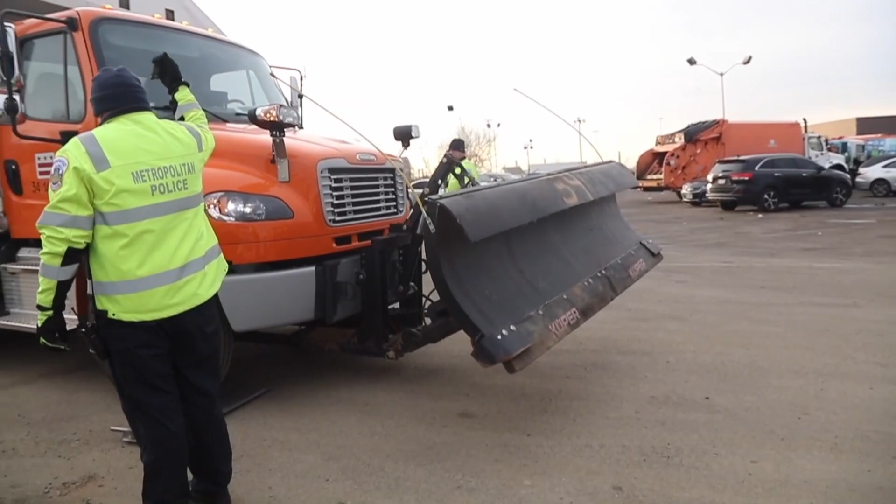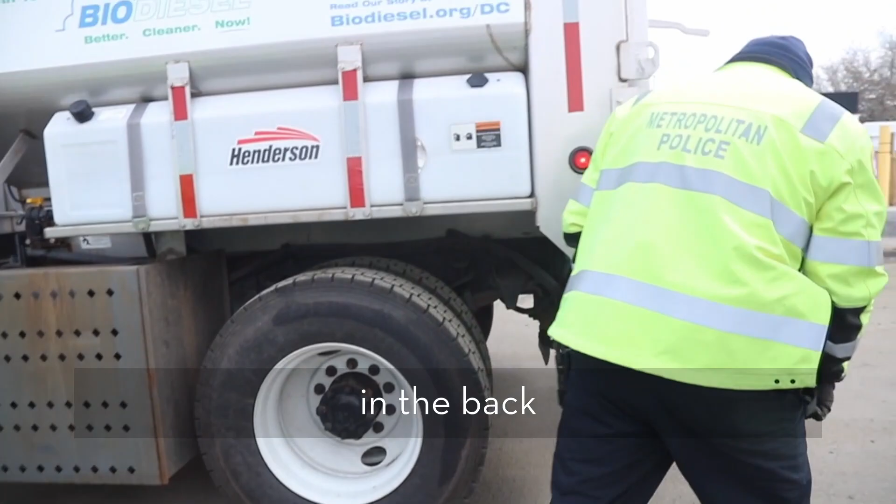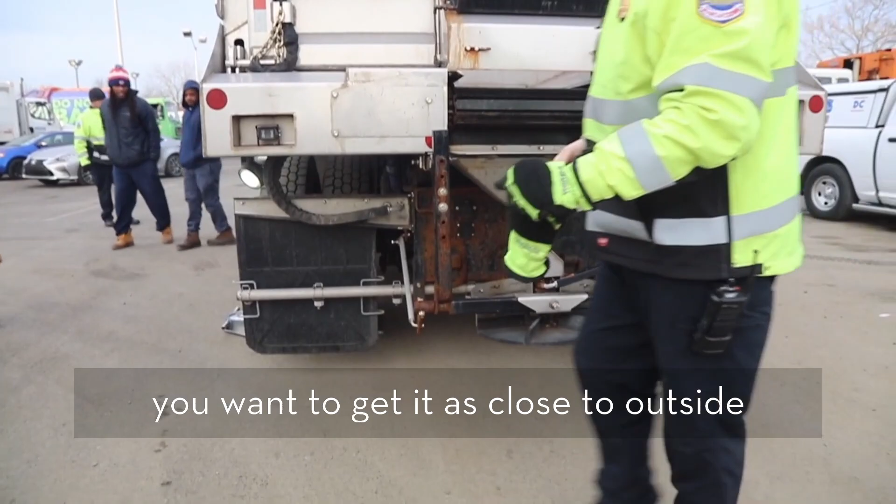Up the tire, and this is the foot of the tire. As long as you see that outside rim, everything inside of that's getting weighed. And if you look in the back, you can see he's on it pretty good because you can see the other side, so there's plenty of room. You just got to make sure you set it up. You want to get it as close to the outside, as close to this bar without going over it, so you know the other tire's on.

So isn't that all for this one? Shouldn't that scale be in some more? No, it could be, but it's on the whole thing, because they're made for dual wheel. So it doesn't matter as long as you're anywhere in that pad.